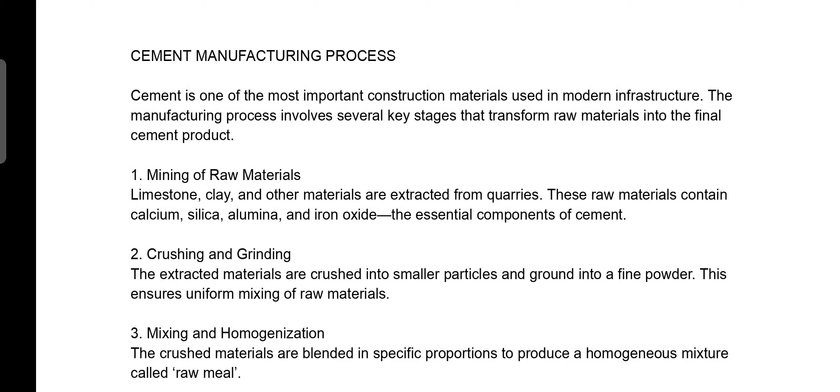Number one, mining of raw materials. Limestone, clay, and other materials are extracted from quarries. These raw materials contain calcium, silica, alumina, and iron oxide, the essential components of the cement.

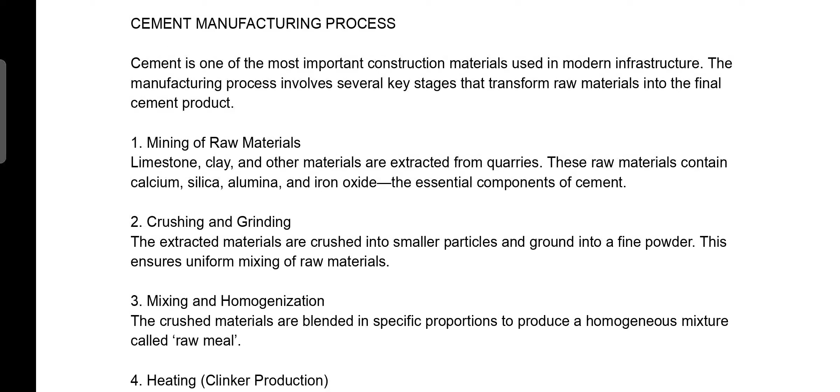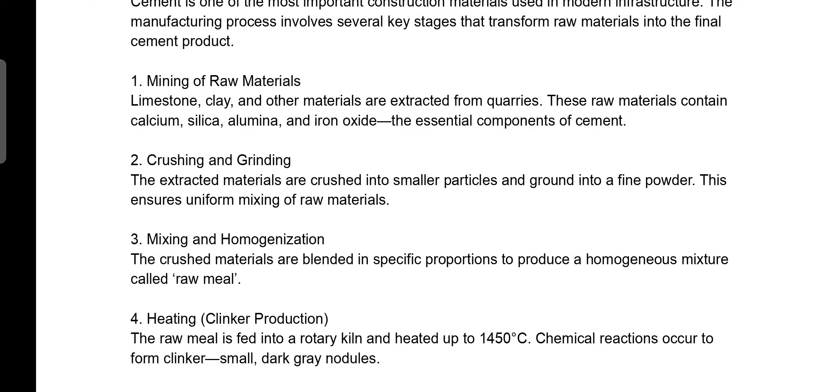Then the second step is crushing and grinding. So the extracted materials are crushed into small particles and ground into a fine powder. This ensures uniform mixing of raw materials.

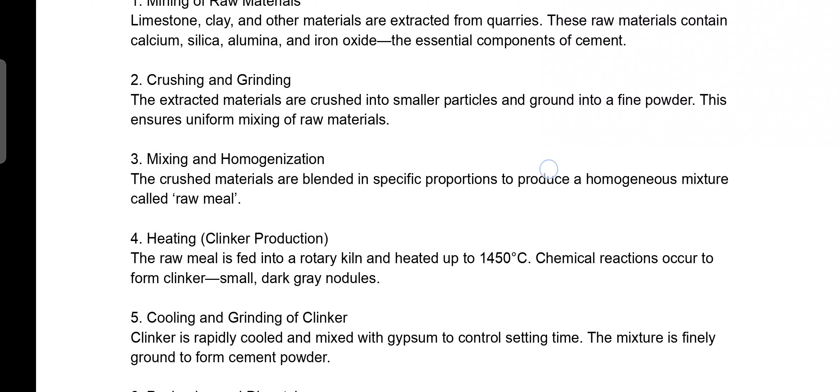Number three is mixing and homogenization. The crushed materials are blended in specific proportions to produce a homogeneous mixture called raw meal.

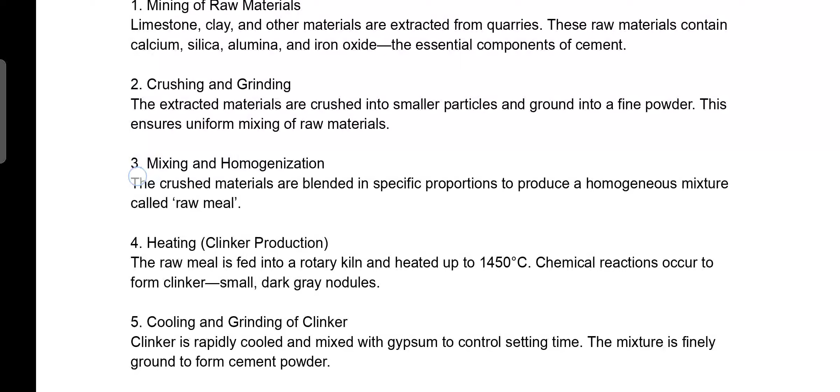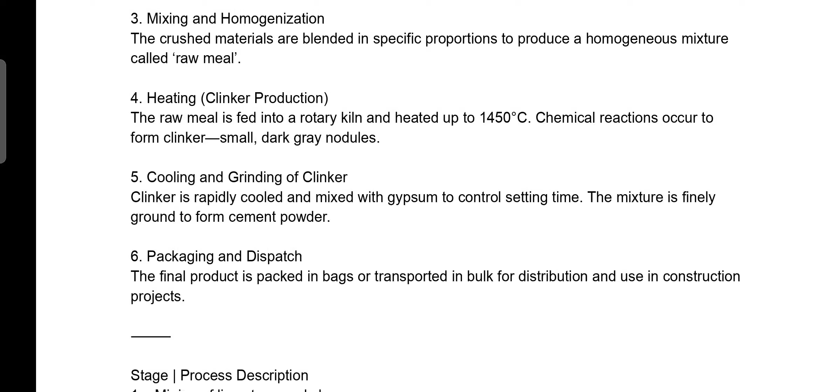Heating or clinker production. The raw meal is fed into a rotary kiln and heated up to 1450 degrees Celsius, 1450 degrees Celsius. Chemical reactions occur to form clinker, small dark gray nodules.

Cooling and grinding of clinker. Clinker is rapidly cooled and mixed with gypsum to control setting time. The mixture is finely ground to form cement powder. Number six is then packaging and dispatch. The final product is packed in bags or transported in bulk for distribution and use in construction projects.

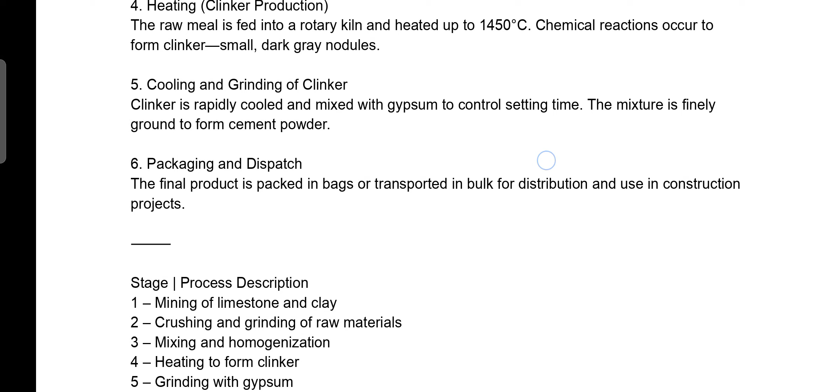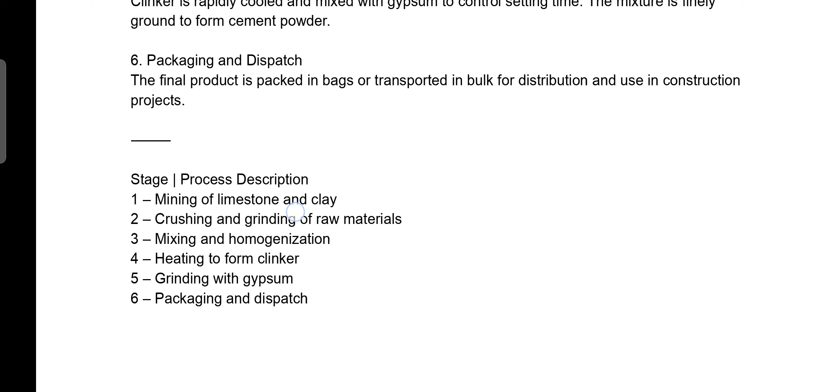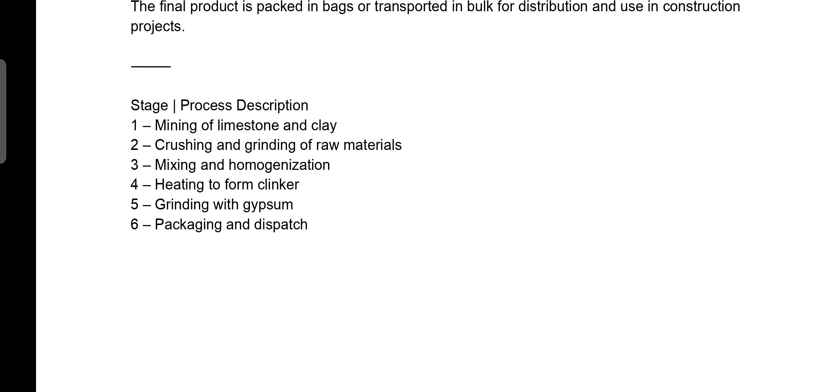So in the cement manufacturing process, you have these 6 stages. First is mining of limestone and clay, then crushing and grinding of raw materials, then you have mixing and homogenization, and then heating to form clinker, and then grinding with gypsum, and last but not the least, that is the packaging and dispatch. Hopefully this video helps you in preparing your notes